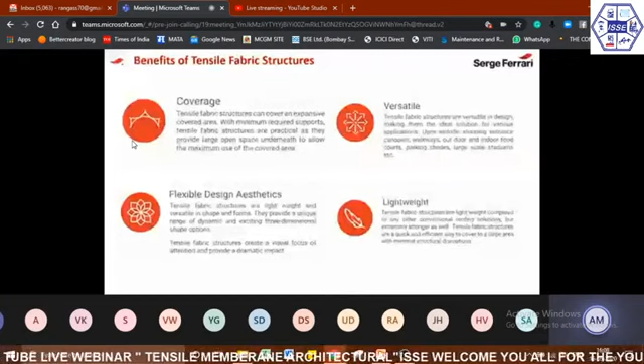Versatile in design. You can put your own signature on the building. It can be used for multi-purpose applications like entrance canopies, walkways, indoor and outdoor courts, parking sheds, large-scale stadiums, amphitheaters, etc. Because it is a flexible material, it can cover flexible designs, different design aesthetics. It's lightweight. Because of its light weight, it can cover wide structures.

We have an extensive color range, even though white is used most commonly. Weatherproof. We have 100% waterproof material. We also have mesh fabric for the application. Another advantage is in a couple of slides.

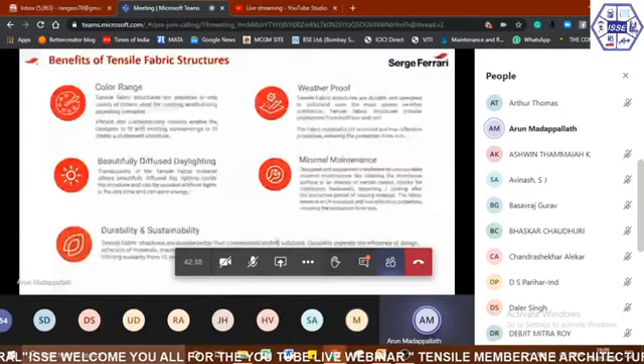Durability, it's a very durable material. Natural light is another benefit of tensile architecture. As you know, the sun gives us good natural light, thus saving on the electricity of the building. You can have good transmission of light, and at the same time, solar energy comfort as well.

We have different types of fabric which can be applied for these kinds of applications. Because of the consistency in manufacturing, the light will be consistent throughout.

All fabrics are flame retardant as well, depending on the type. In flame retardancy, we have PVDF coated fabric, which is self-extinguishing with limited degradation. When fire happens, the fabric catches fire but extinguishes itself, making a hole through which the fire escapes. That is the advantage of PVC/PVDF fire properties. We also have PTFE fabric with high fire classification because the base material is glass.

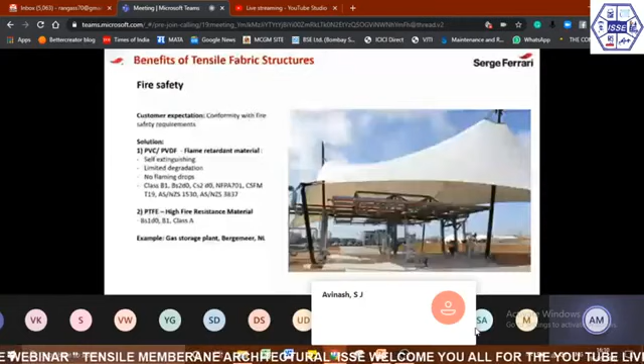Printing is also possible on our fabric. If there is a particular project, we can provide special printing so that you will have high durability of printing as well.

Regarding the lightweight advantage: the average weight of the membrane structure is 1 kg per square meter, and it can take a load of 20 per linear meter of fabric, which is really very high. Because of the flexible material, fabrication and transportation are very easy, and compared to conventional materials, it's much easier to manage fabrication and installation.

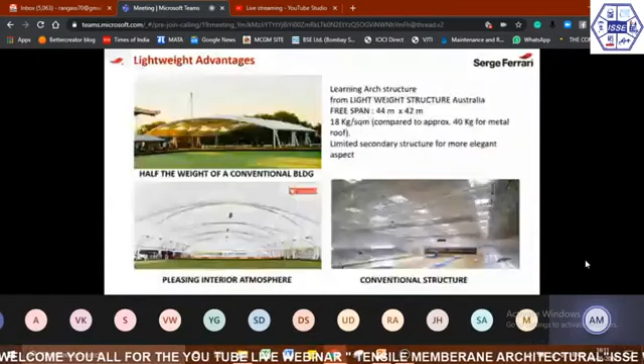It works in tension, and these possibilities exist for free span structures or secondary structures. The weight of the structure is less than half the weight of a conventional building, and there is a pleasing atmosphere because of the translucency of the membrane compared to conventional structures. This is a good advantage of using lightweight membrane structures.

Many applications are possible: stadiums, metros, airports, amphitheaters, indoor stadiums, walkway structures. A wide range of applications can be done using membrane structures, including enclosed buildings and big structures like amphitheaters.

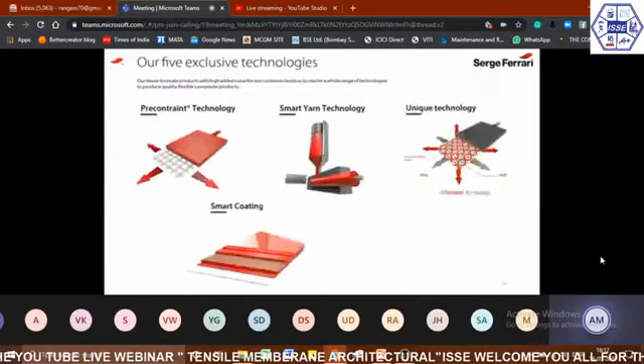Serge Ferrari has a different technology. The important one I would like to explain is the Précontraint technology, developed by Serge Ferrari. It's a French word, and basically it means pre-stress.

It's made of high density polyester, and during the coating process, the yarns are stretched in warp and weft direction with constant tension. The advantage is that the dimensional stability of the fabric is almost the same in both directions. Compared to other fabrics in the market, we have less than 1% elongation in both directions.

This is important because of climatic conditions and load. The fabric behavior is such that it elongates under different climatic conditions, but with Serge Ferrari, it returns back to its original position.

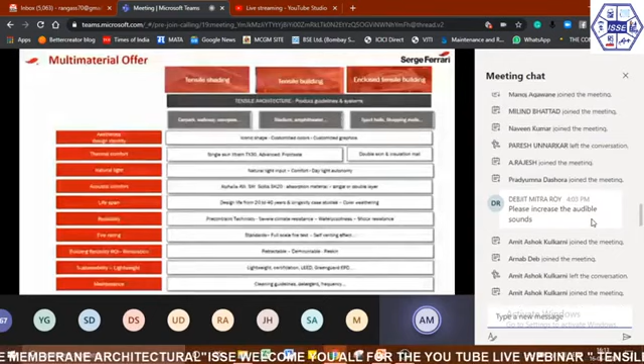In terms of material offer, we have fabric for different shading applications, building applications, and enclosed building applications. The advantage is that we can create a design identity and thermal comfort. If you have a building where you need good performance, we can give you solutions: single membrane, double membrane, or with insulation, while still allowing natural light inside.

We also have fabric for acoustic performance as a second membrane, which can be used for indoor and exterior applications. Lifespan design starts from 20 and goes to more than 40 years. Material longevity is there, and the new range of fabric, PTFE, has a design life of 50 years plus. Because of the Précontraint technology, the reliability of the membrane is good and the lifespan is better.

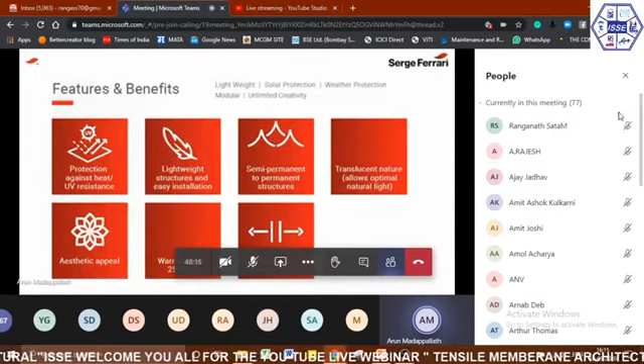All the fabrics are fire rated according to different standards. We also have LEED certification and lightweight options according to requirements, and maintenance is very easy in membrane structures. There is protection against UV, lightweight design, and it can be used for semi-permanent or permanent structures, with accuracy of light, good aesthetics, and warranty up to 25 years depending on the fabric type. Span structures of various kinds can be done using membrane.

This is the range from Ferrari. The premium range in Serge Ferrari is Xtreme TX. All the fabrics are manufactured with high density polyester coated with PVC, but we do a special coating on top of the PVC and on the backside of the PVC.

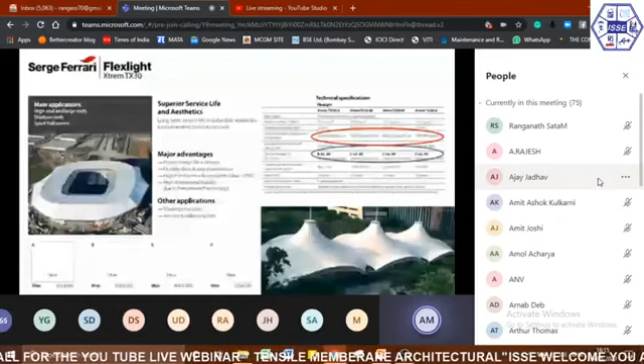Different types of coatings are available, and in Ferrari Xtrem TX30 this coating is special, a cross-link PVDF coating. The molecules of the PVDF are linked together to give a design life of more than 30 years, which is why it's called TX30. It gives TX30 better longevity, which can be used for big span structures.

Because of Precontraint technology and high concentration PVDF, a special machine is required to weld the fabric. This machine is called an abrasion machine. Companies like Western Outdoor have this type of machine to do the abrasion for welding.

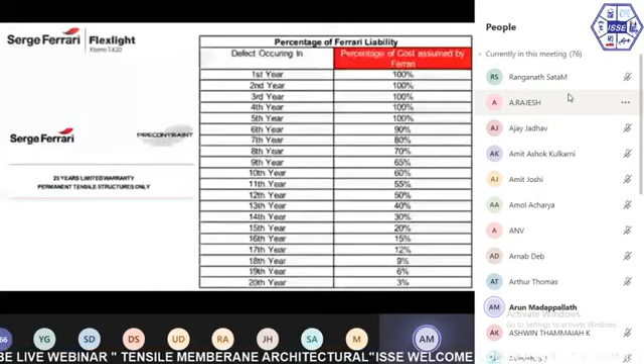With high concentration PVDF, Ferrari is the only company that provides a better PVDF coating, so abrasion is required before welding. We give a warranty of up to 20 years and up to 25 years depending on the structure, and it's a diminishing warranty. The first 5 years we give 100%, and the warranty diminishes after the 6th year.

We have an advanced range of fabric. This is the second range of fabric from Serge Ferrari after TX30, and it's the one commonly used for many projects in India. Again we have fabric types 1, 2, 3, 4, and 5, depending on the structure you can select the fabric. We also have a high translucent fabric in this range, with the same 15 years warranty.

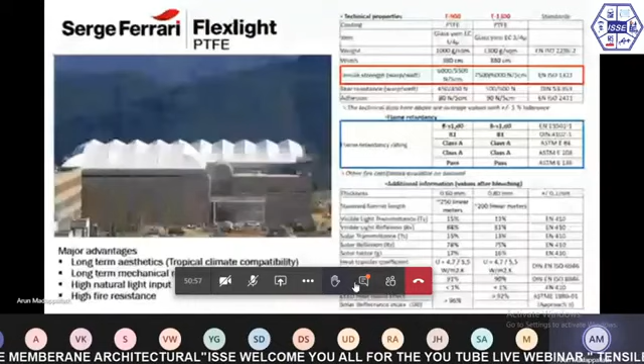The new development from Serge Ferrari is Flexlight PTFE. We have 2 types of fabric, 3 micron and 6 micron. Again, type 2 and type 3 in 3 microns, and type 2 to type 4, type 5 in 6 microns. PTFE is a special material which has better fire retardancy properties than PVC coated membranes. The warranty is 15 years for this type of membrane.

We also submit test reports for all our products, including fire classification reports and other reports, as required for the project.

Here are some case studies. This is a 20 year exposure membrane - we replaced this membrane with new fabric. The membrane structure was originally done using Ferrari fabric and it stood for 20 years. After 20 years we made a longevity study and re-skinned it with this material.

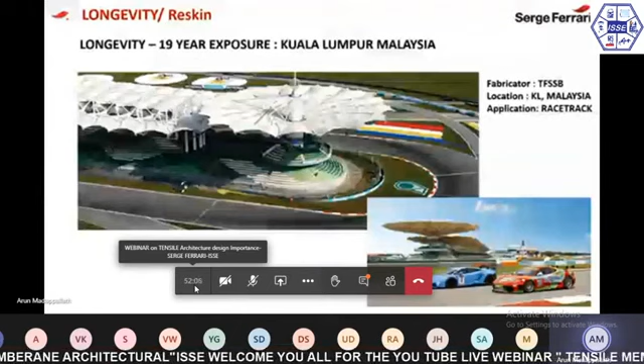Again the same for the KL project - we replaced the racetrack with our new fabric, which is TX30, after 19 years of exposure in Kuala Lumpur. 15 years of exposure in Shanghai Messe, with 160,000 square meters of fabric used for this project, still intact.

So normally it's very good performance compared to the weather conditions of different regions. We have a wide range of tests done for different projects all over the world, and we can provide certification for that.

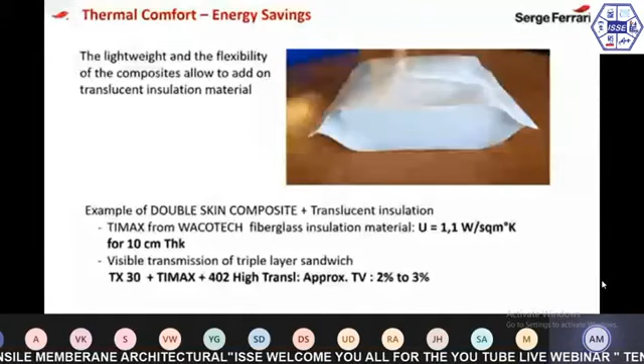Energy performance is an important criteria - there are possibilities of saving using membrane. Here the example given is a double membrane structure with insulation material from Timax. You can reach up to 1.1 watts per square meter degree Kelvin for the U value, and at the same time get 2 to 3% light transmission using membrane.

This is without insulation - we can use double membrane or single membrane. The U value for facade and roof is 5.9 and 6.4 respectively. If you put a double membrane, you can get the U value down to 2.9 and 3.1 respectively for facade and roof applications with our membrane.

We can also use our micro-perforated membrane for better acoustic performance. This is one case study for a double membrane structure - the top layer is TX30, and we used 402 as a secondary membrane per the project requirement to meet the solar factor and U value.

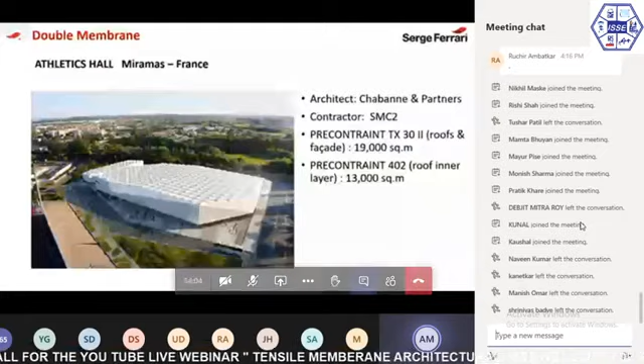For acoustic performance, this is a new range from Ferrari which can be used as a secondary membrane indoor or outdoor, which has an NRC value of 65% with a 100mm air gap. We can go through more details.

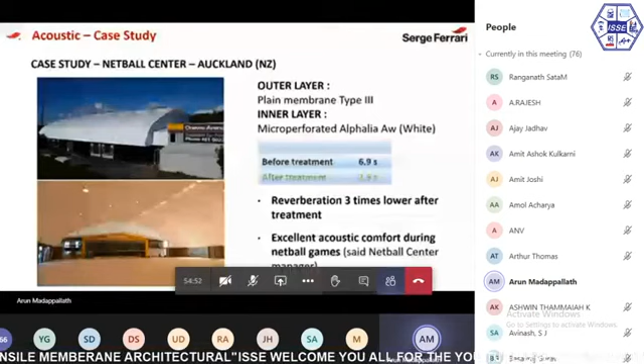This is Alphalia AW, used for internal acoustic performance. In this case study, before the fabric treatment, the reverberation time of the sound was 6.9 seconds, and after treatment it reduced to 2.5 seconds. So with Alphalia AW as an inner membrane, reverberation time is 3 times lower after treatment. This is for comfort of the sports happening in the building, and the reverberation of sound has come down drastically, giving a comfortable solution.

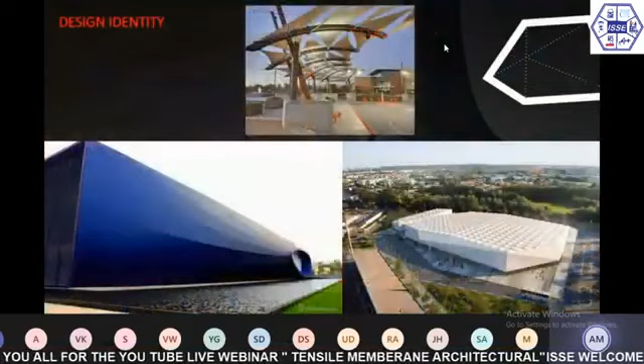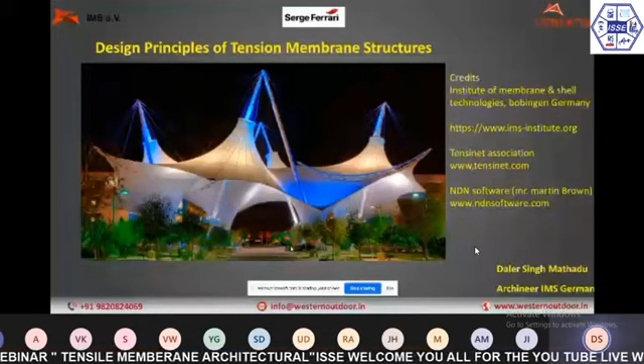And as the skills of mankind advanced with time and experience, they started constructing with other elements like stone, then wood. Throughout the evolution of history, we can see that once we had made something, we always yearned for more. And more meant wider spans, bigger spaces, volumes. That's where the membrane structure industry of present day has arrived.

Normally, I have a topic for architectural students, but here today I am with my friends, structural engineers. So just some notes: tension membrane structures, as you can see, compared to normal structures—classical membrane structures have more tension-only elements and very few compression elements in the entire system. Elimination of bending and other forces like torque and whatnot makes this very efficient. That's how the term lightweight structures has come about.

The most important part of understanding the system is that the roofing membrane is not just cladding, it is the structure. This is where the deviation is from normal everyday structures, where we have a primary structure and a secondary structure. The secondary structure does not necessarily participate in the stability of the whole system. Whereas in the field of membrane architecture, the roof is the structure, so it can be called the primary structure.

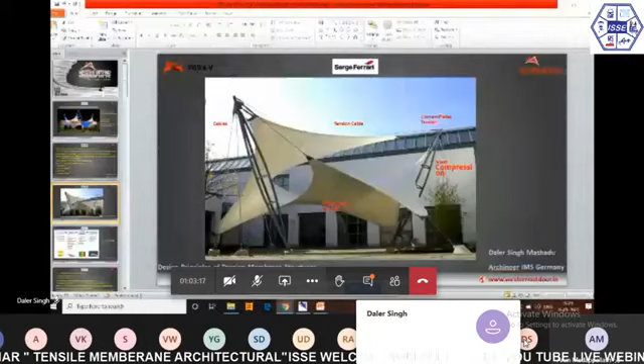Now it's on. Yeah. Am I audible now? Yes. Okay, thank you. I think somehow the mic got muted. So where was I? I was with the start? In this slide only. Okay, in the slide. Thank you. Because normally we are not so used to speaking to the computer without seeing people and their eyes. It becomes difficult. You don't know when you are off and you go on blabbering. Thank you for bearing with me this lacuna, and I request Arun to please bring me back.

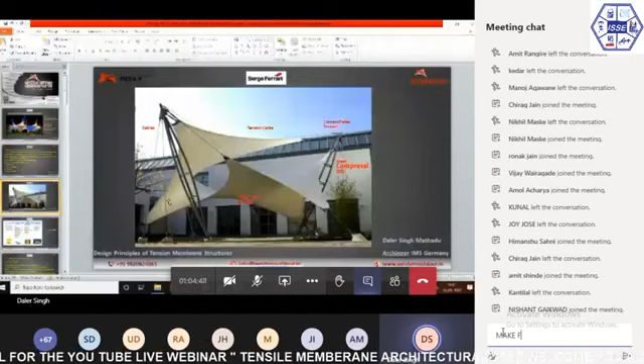Coming back to the tensile structures, you can see over here, the membrane is in tension, the cables are in tension, so are the corners and hardware. And even most of the foundations are in tension. Only 4 foundations where the mast is connected are in compression. This also means that tensile structures may seem light in air, but they are heavy in ground. Because to maintain equilibrium and stability, the ground anchors which take the tension of cables become quite heavy in relation to the compressive foundations of the mast.

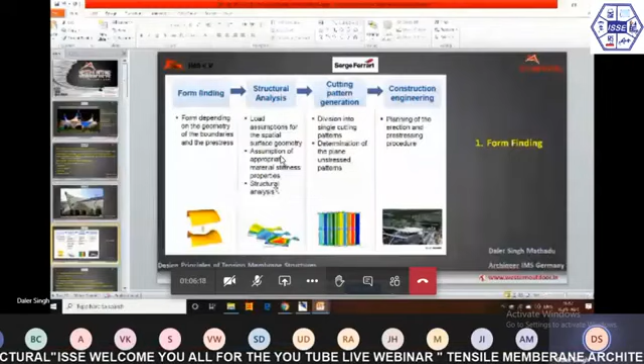So in short, this is how the system looks like. Free flow of this process: the form finding, the structural analysis. Now here when I say structural analysis, today with this time constraint I will restrict myself to the analysis of the geometry, the fabric and the cable part.

And then there is one very important aspect of, hello? Yes, continue. Okay, thank you.

Cutting pattern generation and then construction engineering. Moving forward, the 2 most important parts.

Can you make your screen big, the presentation mode? Okay, one moment now. Is it okay now? Yes, yes. Okay, thank you. Sure.

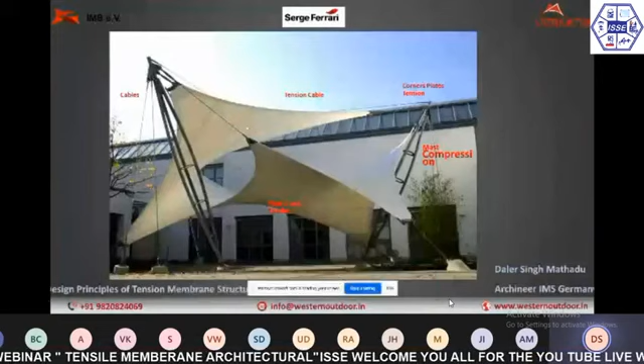So if we see this membrane construction, there are 2 inherent forces, 2 important criteria. One is the geometry and the other is the pre-stress. The combination of geometry and pre-stress is what we call the form. So in the relationship between form and force, we can call pre-stress a force. The interdependence is that form follows force and force follows form. Now, this is a very unique deviation from the normal statically calculated structures.

What does this mean? This means that if I have a weaker form, for example the curvature, you can see in this small 2D representation of the forces acting on a tension cable, that with the curvature being less over here in this part, we have more forces for the same applied force. So geometry acts as a component of stability rather than just a shape. That is why the term form finding.

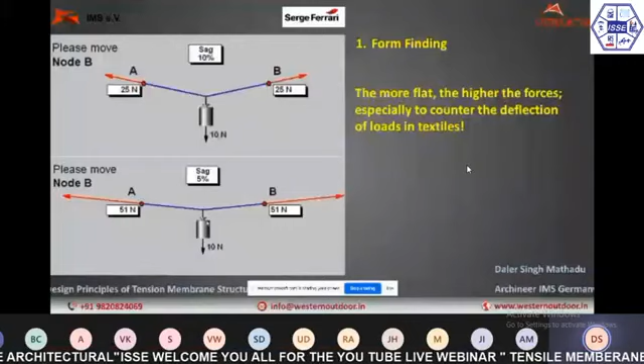Because an engineer who is supposed to develop a structural system and has been given some inputs would like to make a reasonably efficient, highly curved surface fitting with the parameters of the architect or the client. So here this process itself becomes an iterative process. Unlike the normal structural process where we have the main structure and then there is a choice of cladding, whether it may be metal decks or plastic sheeting or something else. That becomes secondary.

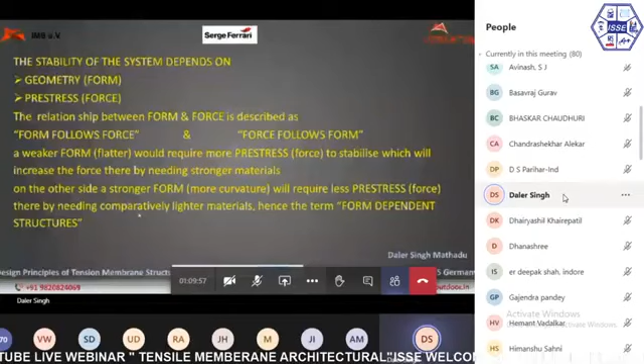In fact, in membrane structure, we have a top-down approach to design itself. And the top-down approach means find the form and the pre-stress needed to stabilize it, and then eventually once we load, we come down to the main substructure or the supporting structure. So the interdependency is the fundamental part of tensile structure design: geometry and pre-stress, form and force. Force follows form and form follows force. It's a deviation, but it's very exciting, friends. Once we get a little bit of hang, the brilliant minds in this seminar can easily take it up.

Now from 2D, if we go 3D, on the left hand side, if we see the first picture, I hope the picture is here. Yes. There are two cables. Thank you. There are two cables stabilizing the point M in 3D space. Now, as I can demonstrate, if cable AB is more tensioned than the cable DC, the point M will move upwards. Means the geometry changes. Similarly, if the opposite side cables are in more tension, then the point moves down.

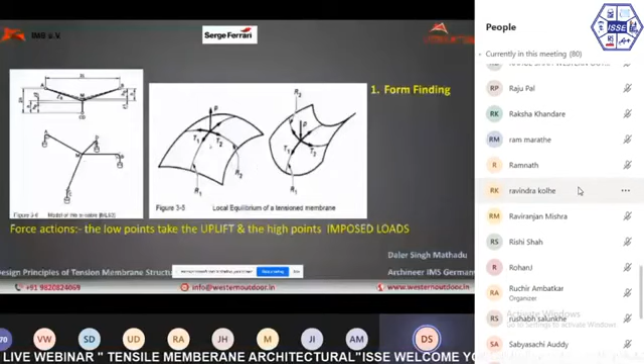So the force and geometry relationship can be seen by a simple model. On the right hand side, we have now converted this into a surface. So what we can see over here is surfaces. The surface which is inflated is a synclastic surface, and the surface which is inverted is an anticlastic surface. Two most important

geometries for membrane structures. We all know the flatter structures won't work with membrane structures because less geometry means too much pre-stress to stabilize it. And as we start increasing the pre-stress, the forces go on increasing, and so the structure becomes heavier and heavier and heavier.

Yes, if we stick to the geometries of synclastic or anticlastic shapes, we can bring in the component of geometry and play around with pre-stress so that we have a stable structure and the supporting components are also reasonable and easy to the eye.

Here we can see once more how this anticlastic surface works. If you see the cable R2 and R1, for example, the structure is loaded with imposed loads, like wind load, snow, or any other imposed load. The cable R2 will be under tension and the cable R1 may relax.

Here I have in front of you what we call a boiler formula, or the component pressure in a cylinder. This brings me to a simple solution. In a curved arch, tension is equal to pressure into radius. So as the radius becomes shallower, the tension will increase if the pressure is constant. And similarly, when I go on increasing the curvature with the same kind of pressure, I'll get lesser tensions. And this is how we actually hand calculate.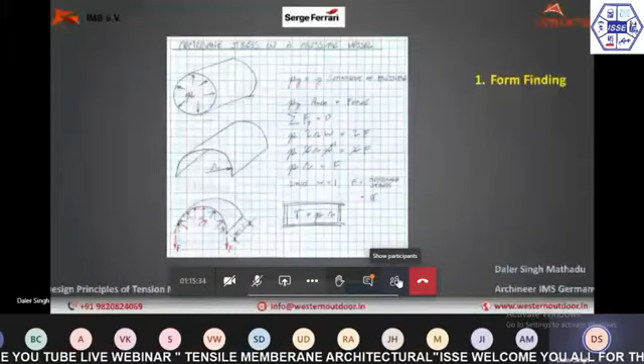Because as we all know, today's world is full of softwares. There can be elements of garbage in, garbage out. There can be elements of missing something because these are complex geometries, non-linear stuff, different E-moduli, different algorithms used. And once we come out with a solution, it has to be hand checked: am I near or am I way off? So these are the two formulas. One is which I am sharing with you, and the other is the force density formula.

Now coming back to the actual shapes and the variations of shapes possible, the geometry possible, because we see various different geometries all over. The first one is anticlastic shape, or what we call a hyperbolic paraboloid. Architects love to call it a hyperbolic paraboloid. And on the right hand side is a synclastic structure. It's a component of pneumatics.

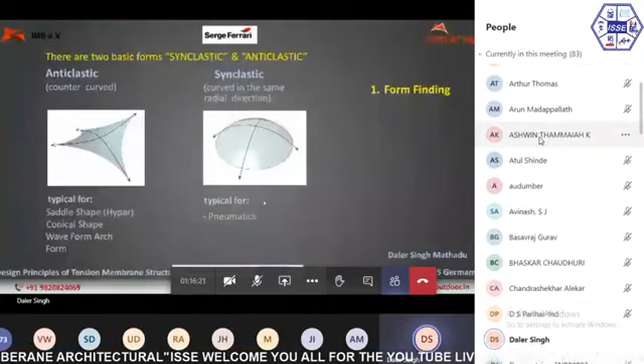In the pneumatic structures, there is an additional component which is the pressure. It can be a double skin structure or single skin structure, as you can see in air inflated structures, where the stability comes by pumping pressurized air inside the membrane. And depending on the atmospheric pressure or wind conditions, this pressure is modulated.

And this has helped us in making huge structures which can be deployed in hours rather than months, and which can withstand a lot of forces in snow. In Europe, where there is 6 or 8 months of snow, for outdoor sports like skating and volleyball, tennis, football, you can see large air domes where the inside temperature is maintained inside the envelope, maintaining the temperature as well as maintaining the stability of the structure.

However, today's topic is the anticlastic structure, the classical membrane form. Talking about variations, you can see how the basic forms evolve. The conical structure, which we regularly see all over, it may be like this or inverted, a funnel shape, which I think everyone getting out of the Mumbai international and domestic airport would see at first sight. Let me tell you, friends, these structures are now almost 14 years old. They are still stable and they look absolutely fantastic.

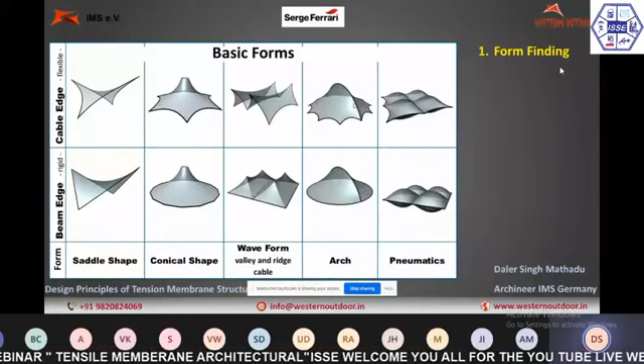Just a reference to Ferrari fabrics with excellent creep resistance properties, technology, and coatings. We can surely make our so-called umbrellas last for as long as we want. So the conical structures are again anticlastic structures. On every given point of the surface, most probably we will find two curvatures going in opposite directions. And so is this wave form and this arch and again small arches. The upper line is with cable edges and the bottom line is with beam edges.

So a cable geometry leaves wide areas open. In cities, we are restricted for space. We want to have a structure, but not give much of space. So we can use rigid edges, called a beam edge.

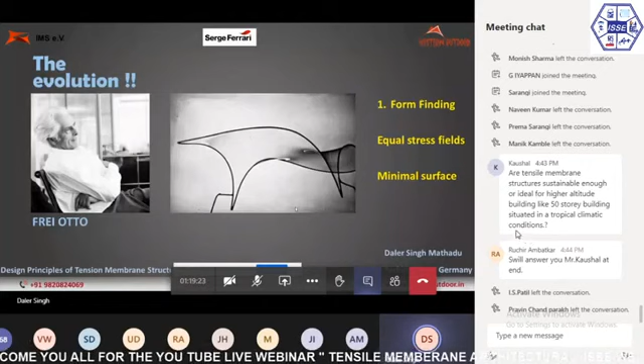He had an idea that if you take a boundary and dip it in a soap bubble liquid and it comes out, it will be a minimal surface. The reason being, the soap bubble film is so vulnerable and so thin, it cannot bear uneven stresses. The minimal surface was so that we can save on materials, find a minimal surface between given geometry. Till that time, the algorithms and the equations were not there. I think this is around the 1960s. So even computers would be the size of buses, maybe BEST double-decker buses, God knows what. So it was left to imagination.

And then there was another contrasting thought of creating an equal stress field. Because as we all know, these structures, although they can be reinforced, are not like normal structures where we can use a heavier element at the corners and at mid-span go on being lighter and lighter. That is not possible with membrane structures because they are also skylights. They allow light inside.

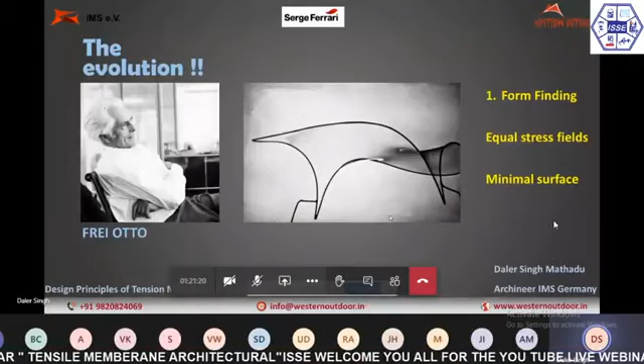So he was experimenting with his soap bubble films and he did a lot of research on various shapes. The photographs are all from the life and history of Frei Otto, his works, and we can see the intensity and passion of trying to find a form. And he believed that if a form is a minimal surface, it has to be an equal stress field. With an equal stress field, we can use very light, flexible materials. We do not need something which is very strong and which takes a lot of loads.

He did a lot of experimentation and eventually he arrived at this. And we all know this was one of the wide span structures of its time, the path-breaking cable net structure of the Munich Olympic Stadium. Till such time, engineers were working around, trying to work out various numerical theories, models, equations of the second and third order, trying a combination of materials and trying to work out interdependence.

As you can see, with membrane structures, when we start analyzing them, being very flexible, the first iteration of load deforms the geometry. And suddenly, there is a new geometry. And this new geometry will work towards its stability now. So it is not a static load which we put once and then come out with the results and stresses. Here, with every iteration, the geometry also changes, and so does the force. So all the time I have to remember that form follows force and force follows form.

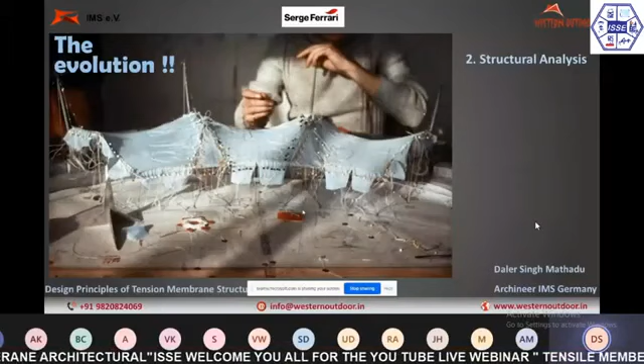And you can see over here the evolution. The small pieces of similar weight and trying to work out cable fields, although this was a cable net structure covered by plexiglass, because at that time our forefathers were not so confident about membrane structures. So they put plexiglass on this cable net structure. You see here, this covering is all plexiglass.

However, while working on this, the engineers, and that is where the force density method of analysis happened to be. And since then, you can see how daring mankind has been, how the earlier works have given the courage and experience and the tools to various people. So this is Denver Airport, landmark structures throughout the world.

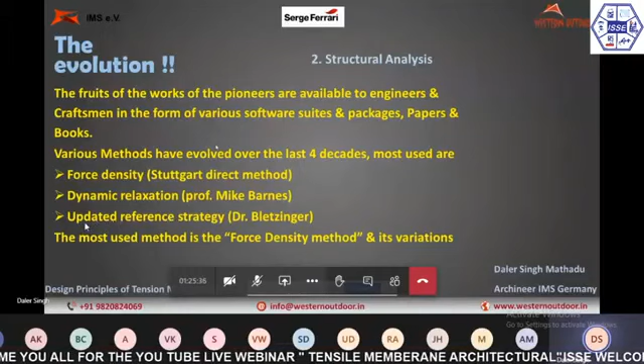So here are the available tools which evolved from there, the force density method. It was also called the Stuttgart direct method, the dynamic relaxation by Professor Mike Barnes, Bath University. And then there was the updated reference strategy method by Dr. Bletzinger. He comes from the Munich Institute, and he is associated with the Institute for Membrane and Shell Technologies.

I have taken a small model and just wish to take you through the process of what I have earlier described. There is definitely a geometry import into the structural system where we define the boundaries and the heights, etc. There is a generation. This is the nonlinear 3D phase. Once we do that, we do a process of form finding. This form finding is algorithmic and numerical.

And then we play around with these stresses. For example, if I have curvature in these cables, I know I will need slender cables. But at the same time, my covered area would reduce and the architects would throw away my structure and say, Daler Singh, I want to cover the whole area, not 50% of it. So again, I'll have to increase the pre-stress in the cables, which would mean more force into the system.

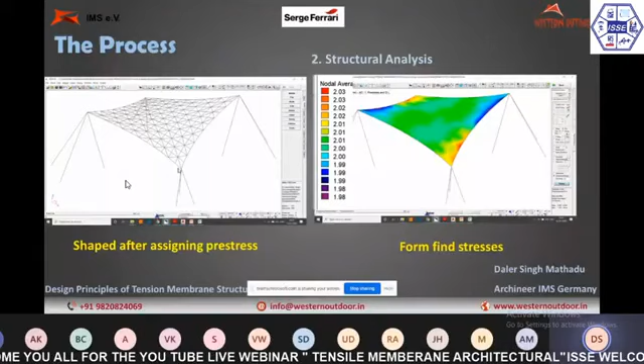And once the engineer works out an equilibrated shape which satisfies the conditions and is almost there, we run through a small structural analysis of just the pre-stress. And you can see on the right hand side, this is the analysis of the pre-stress. The pre-stress was envisaged as around 2 kilonewton, and we can see over here through all these numbers that we have a very uniform pre-stress.

And then comes the loading part. The loading part again is a challenge. The normal forms which are described in codes, the wall shape, pitch roof, the freestanding, the Northlight ones, and membrane structures with their unique shapes, combinations of shapes which are conical with a hyperbolic end and whatnot. So it becomes very difficult to estimate what the wind loads will be.

Again, thanks to the various computational fluid dynamics programs around the world, we can do it at a much faster pace and much lower cost. The earlier membrane structures were all subject to wind load analysis, wind tunnel testing, and it was very time consuming, and it took a lot of time and a lot of effort, which included a lot of money. But frankly speaking, there was no alternative to membrane structures.

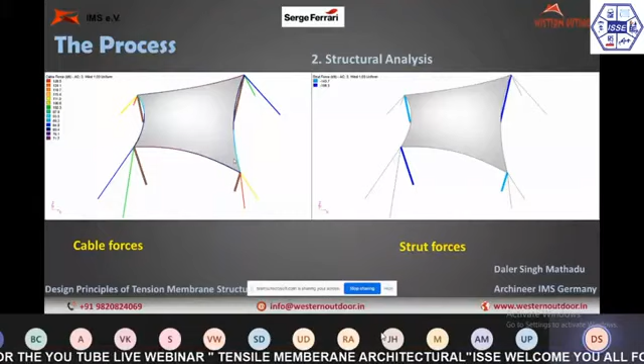You can see over here the forces, some forces in the struts, forces in the cable, and then the cutting pattern generation. Once having made a 3D surface, Ferrari supplies us with rolls of fabric.

So there is one part, it is the unfolding of surface. People tried various ways like making small 3D models, pasting of paper on it, cutting it to a shape, and then unfolding it and enlarging it. But with the present day computers, it's become much easier now.

The seam line drawn over here can be geodesic or can be section cuts. The difference between geodesic and section cut is that geodesic, as we all know, would be the shortest distance between points on a curved surface, whereas the section cut would cut it simply through. So geodesic cuts make the edges straight, which means we will have little loss of fabric and we'll be able to utilize the entire roll of fabric.

Now this patterning is also an architectural part of the structural system, where we can line the seams in such a way, whether it may be diagonal, perpendicular, or any other shape, or maybe in 4 sides. However, the most important part is to understand the warp and the weft of the primary material, which is the fabric.

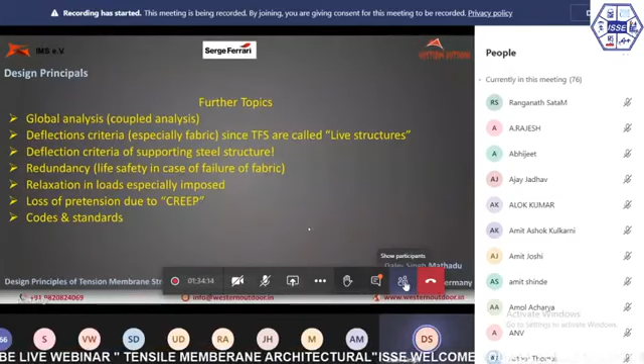Maybe further topics. As we talk about global analysis, the coupled analysis, which needs special packages, we talk about deflection criteria, especially of the fabric and the entire systems, as these systems are supposed to move. They are live structures. That's why they are not used for housing complexes or abodes, but for temporary camps, tents, stadiums, malls. But this criteria is different from the normal criteria. We have these thumb rules, the deflection criteria developed by the TensiNet Association.

This is due to the uniform lack of codes and standards, where we have Japan developing its own codes and standards, so was US, so was France, and to a certain extent UK and Australia. Coming back to India, if I have to satisfy the Indian codes deflection criteria, I don't think I would ever be able to make a tensile structure because it's a large deflection structure.

So the normal criteria that we follow is that under normal wind loads or even full wind loads, it should not be so much as to make it obvious, and then the users start panicking below it that it might come down. So user comfort is again a criteria for deflections, and again it is left to the engineers. However, we can introduce a lot of cable elements inside the membrane, thereby cutting the deflections and bringing it to a reasonable level of about L by 50 or around 30. Internationally, these are considered good.

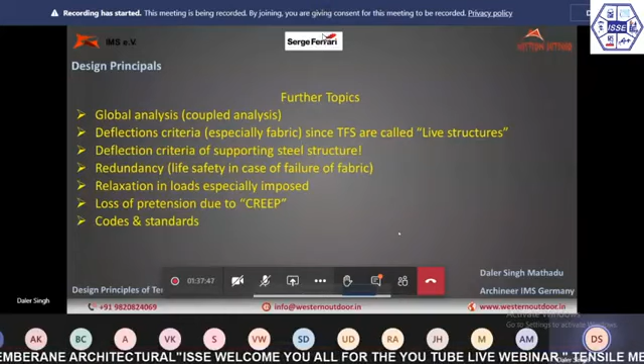Universally, 0.4 or 0.5 kilonewton is the expected criteria. And even today's engineers in India are open to out-of-box thinking, not sticking strictly to the code, but using their own imagination, intuition, and experience. They can envisage that such a highly curved surface cannot hold a person every square meter. That's not possible, so why put it?

The last criteria I'd like to touch on is loss of pretension due to creep. Elastic elements under constant loads will tend to creep, and our structures depend on pre-stress for stability. Creep would mean loss of pre-stress.

In such cases, better quality materials, such as those produced by Ferrari with their Précontraint technology, stretch the fabric while it is being coated, and the stretch is in equilibrium. It is similar in both directions, the warp and the weft, and on the length side both, which shows that the creep, if ever it occurs, is uniform.

Taking the element of creep into account, membranes normally have a retensioning system built in. The engineer, taking a top-down approach, takes care of the creep, the forces, and the biaxial behavior of the fabric.

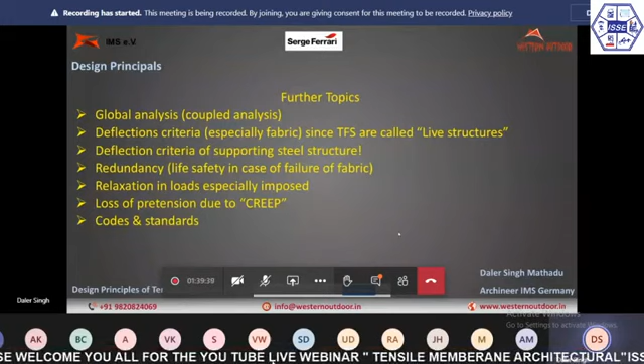Biaxial behavior is very important for fabric structures because there are manufacturing companies whose fabric does not have similar behavior on both sides. For introduction of pre-stress, compensation, or cutting the fabric short, is an important criteria.

If you see these flat panels, they would be compensated to the exact percentage required to put in the pre-stress. Once stretched to the system point, theoretically we can say, yes, we have put in 2 kilonewton pre-stress. So that is another element the engineer has to think about.

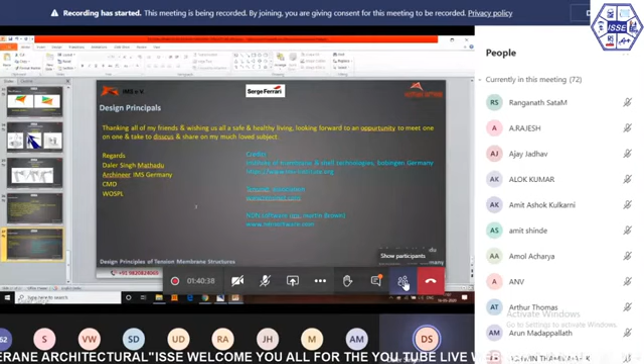Eventually, last is about code and standard. I think I've taken five minutes more of my time, while thanking the Institute, Ferrari, and all of my friends gathered here today on this Saturday afternoon in the Corona lockdown, listening patiently. I would thank you from the bottom of my heart because I represent not only my industry, but the membrane industry as a whole.

Being passionate about it, I would want more and more architects to use this lightweight, eco-friendly, preserving material system wherever it is appropriate. Appropriation means wide spans, smaller structures, and in fact, if you see COVID hospitals, most of them are covered with fabric, whether inflatable or clear span.

If all the advantages are appropriate for the usage, then I can assure you that with today's availability of materials, experience, and computational tools, complementing machineries like cutting plotters which can cut fabric to an accuracy of 0.2 millimeter, high frequency welding machines, and testing facilities, all put together satisfy your requirement for an aesthetically pleasing and stable structure.

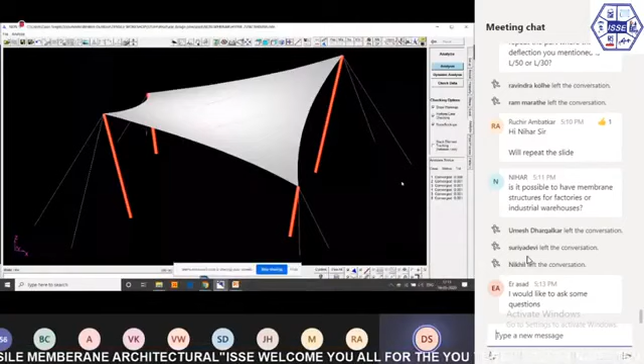Let me be very clear - I'm a student of the field, and I would not want to use such a beautiful material where it can be replaced by something cheaper, where it is not appropriate. For example, industrial buildings: membrane is very lightweight, so thermal comfort is restricted. It bounces UV light, but being a very thin film with low mass makes it vulnerable and uncomfortable in enclosed surfaces.

It means you'll need to make it comfortable by either insulating it or putting in a lot of cold air, or in case of Europe and other countries, you need to purge hot air. Then you come out with condensation issues.

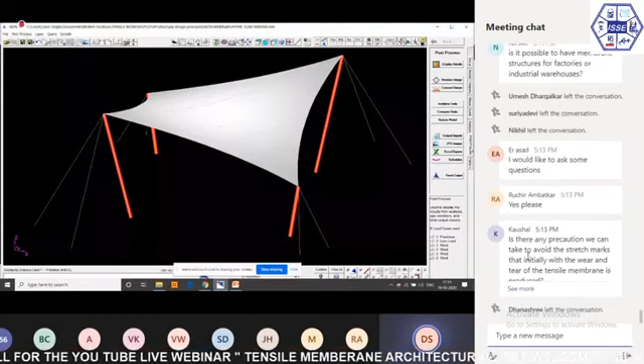Talking about warehouses, yes - deployable warehouses where the fabric can be removed and reused multiple times. We can all see exhibition structures, present-day wide-span exhibition structures. They are quite stable if they are well designed with the code and standards by an experienced person.

The present industry is also asking for a lot of warehouses. Recently, we built one for Lupin. Now I am in the process of developing fast deployable COVID hospitals for my municipality, the Thane municipality, and very soon, within a day or two, I will freeze the concept.

I had proposed pneumatic structures, but the corresponding engineers are still not so comfortable with this - they call it a vague idea. So they asked me to put in some steel and fabric and forget about the rest. That's how it is, but yes, we can do it.

Thank you very much. Another question: can these structures be designed in STAAD Pro for steel members? Yeah, why not - there are possibilities.

Ruchir, is my screen visible? Yes, fine. For example, this is a classical structure, and the strut elements here, the red color elements, are struts. It is just a compression-tension member - it cannot take bending, it cannot take torsion, it's free.

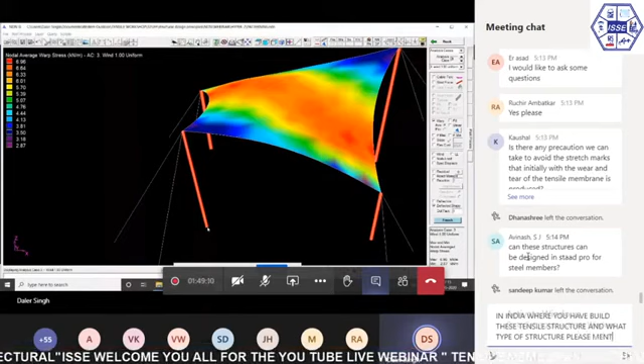Just for this single member design, how will you model it in STAAD instead? This will not be possible because these are two cables, and there is a corresponding cable over here stabilizing the system. Such structures are not possible in STAAD - it is better to hand calculate the steel because it's much easier now.

What we come up with - let me show you the forces over here. Let me see the reaction, and we simply find out that this strut member is undergoing 182 kilonewtons of compression. Given the length, I can easily work out the type of section needed and the thickness.

For complex structures - rigid frames like the Kanha Ashram structure shown to you by Arun, which covered more than 4 acres - we can do an uncoupled analysis where we create a set of nodes which are assumed fixed, representing the connections between steel and membrane. We analyze the membrane separately and transfer the forces onto STAAD or SAP or any other software. So it can be done.

Many times, corresponding engineers or vetting engineers, when we go to IITs or engineering colleges, we often need to either hand calculate or provide them STAAD files which can be checked. Yes, it is possible, and we can do it for most of the cases.

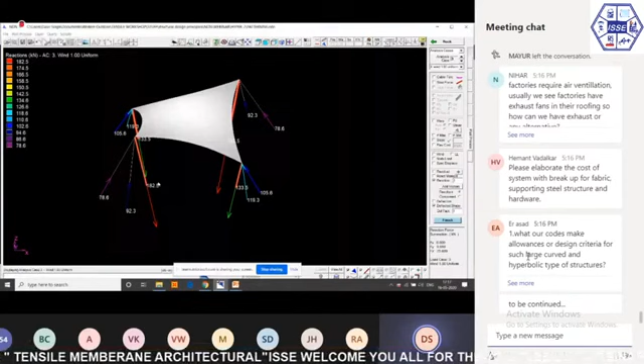One more question is that factories require air ventilation. Usually we see factories have exhaust fans in their roofing. So how can we have exhaust or any alternative?

Well, we can put on turbo fans over a structure. We can create vents, we can stagger them, make them north light. Yes, it can be done. Now if you want other ventilation, preferably from the sides for air ventilation, there are strong meshes which can be used that allow a certain percentage of air to come inside. So rather than have louvers, we can use mesh fabrics, and these are regularly used in various stadiums. So it can be used.

Okay, sir, another question. You wanted to see some Indian reference, project reference. Could you please show? I'll try to pull out one of the structures. Meanwhile, I would...

Well, we can go on to the next question please. Okay, one sec sir. Okay, please elaborate the cost of system with breakup of fabric, supporting steel structure, and hardware.

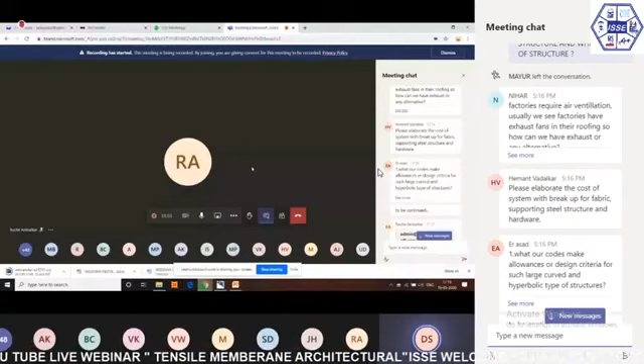And this is how the spread is. Overall material cost and the cost of production would be around 60% of the total cost given to you. So 40% roughly would be gross margins for the design build company, whosoever makes it.

Now talking of the price range, a simple structure can start from 300 rupees, and then a very complex shape, complex geometry using cables, using fabric, using glass, can end up to 1500 or 2000 rupees a square feet. But the normal range for cladded structures used throughout India with good quality Ferrari 25-year fabric can be had around 600 to 800 rupees a square feet range, where the steel consumption comes around 3 kgs a square feet or so, just giving you a thumb rule.

Okay, now again this question has part two. Yes, strength and serviceability criteria limitations. Right, now we use the same criteria as used for any other structure.

Now the limitations, if we compare it to steel, as I mentioned earlier, the material cannot be compared point to point, maybe glass, concrete slab, or a steel deck. Every material has its own inherent advantages, and if you compare it with some benchmark, then it can become disadvantages. Like I spoke about creep. Creep is one element where there will be loss of pre-stress over the longer serviceability state, talking about 20 years, 30 years. So adjustments have to be made for that.

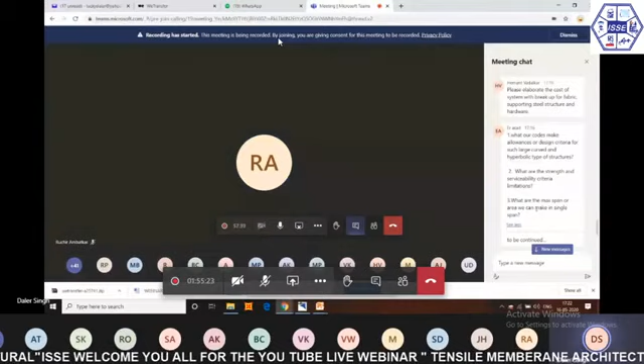Large spans are possible. Now talking about a max span, let me take you back to the time when Frei Otto was thinking, and he wanted to cover huge spaces. He had the idea of covering huge cities. In fact, the dome created by Nicholas Grimshaw, what we call the Eden Project, it's a diagrid structure, a space-frame structure with pneumatic structures on top, and then eventually he has an entire tropical island.

So the span, if we speak in general, if you're talking about 100 meters, it's okay. It's okay with a truss cladded structure. It is normal these days to think of such meters. But if it goes beyond, then there has to be a lot of input, a lot of out-of-the-box thinking, a lot of different material possibilities.

But I do believe that the bounds of the human mind are limited to imagination themselves. Because if materials are not there, they can be created. If numerical theory is not there, we can see Frei Otto create it. So I think it is, Asad ji, I would say yes, if you can dream it, let's do it. Let's try it. Okay, why not?

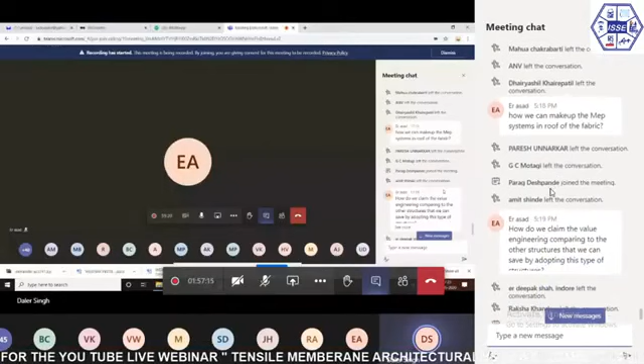Now again, how can we make up the MEP systems of the roof fabric? Now, as I have mentioned, we can have a sub which would take care of all the lighting systems, all the ventilation, all the air conditioning requirements. Yes, that is normal. But most of the structures, if you see in malls, etc., we use them to have a roof which gives in a lot of skylight, so we can save on energy. But again, most of the malls are covered with fabric, and they all have their MEP systems; hanging from the roof, the architect may not like, so they come from the sides or the peripheries.

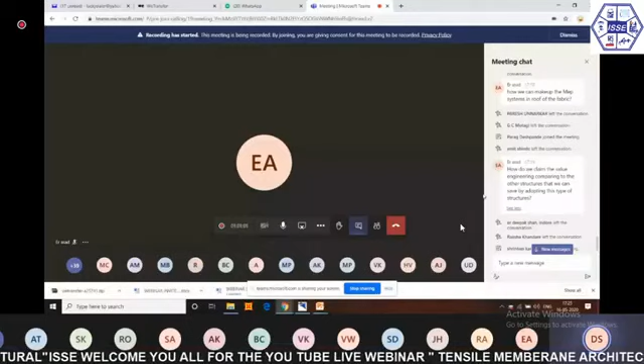As we all know, cable net structures, we have a tension ring inside, then we have a compression frame outside, and between the tension and compression frame, we have cables stabilizing both for the imposed loads and for the uplift. So value engineering can be done comparing the usage and the needs, not by comparing to other structures. This is what I believe is where the value engineering comes from. When I need to cover a certain space, yes, I can check systems, whether I can have a rigid cantilever going on, or whether I want a complete cable net structure.

So a beautiful example is the Jawaharlal Nehru Stadium. Again, it's got good cantilevers. Again, there is no structural element connecting between the tension ring and the compression ring. They are all cables and membrane. So yes, a lot of value engineering can be done because the possibilities are endless. As I was explaining earlier, form and pre-stress, usage of materials, addition of cables, you know, we can do a lot.

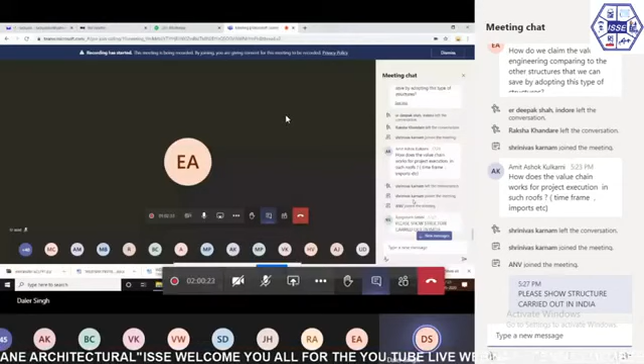How does the value chain work for project execution in such roofs, time, imports, etc.? Well, generally, if we compare it with PEB, the pre-engineered buildings, we can say we are very comparable with them. But when you talk about large spans and stadiums, then it's a different game altogether. Now, with respect to time frame, I would like to mention over here the development of the tensile structure industry in India has been very rapid. There are a lot of fabricators, good companies, good freelance engineers, and very good suppliers like Ferrari who have put a lot of effort into developing the Indian market. They have stocks, but still stocks can be made and brought in within a very short period of time.

For a project like a stadium, I can see a total working of, say, around 6 months for maybe 30-40,000 square meters. So again, the time frame would depend on the usage, the type, and the complexity of the shape.

So, Ruchir, would you show the structures carried out in India? Arun sir, he has a better picture. He'll try. Okay. Yes, I think I have it on the screen. Just go through it.

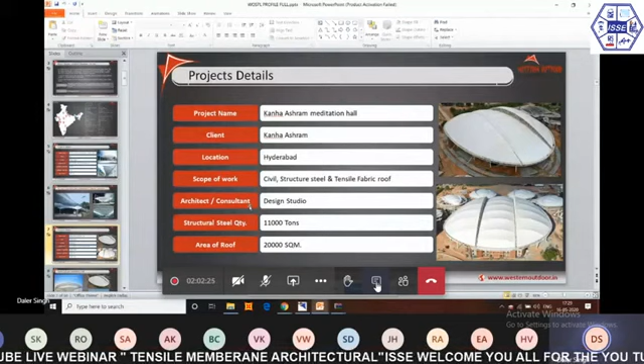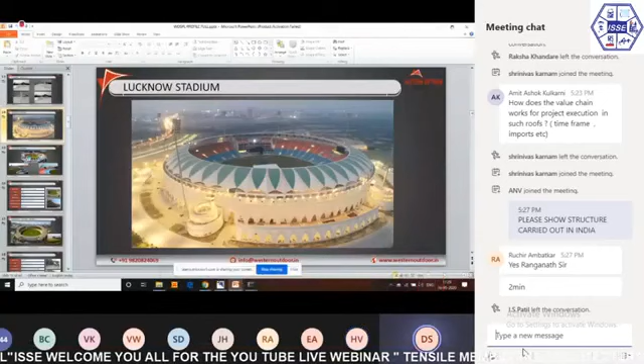This is the Lucknow Stadium, where we can play around with colors. Now, when the stadium was designed and constructed, at that time the green color represented the Samajwadi Party. Now, we cannot change it to red. This is how it is. This is how India works. And so this is where we have a tension ring, and then there is a compression ring outside, with arches spanning and the fabric stretching and valley cables stabilizing the fabric. Here are the cables.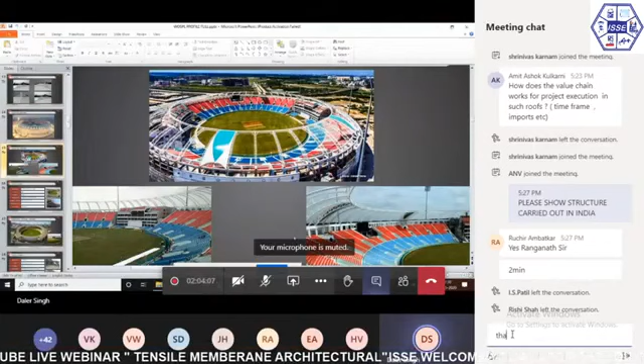Here are the valley cables, and again taking into the system. So this is how we can design a very simple one. This is under construction. The overall usage for this 30-meter cantilever was around 35 kgs per square meter, which is considered lightweight, very lightweight. But the geometry is fantastic.

You see, I have a complete ring inside, and it's a hub and spoke model, one of the most stable geometries which we can ever play with. And this is where the geometry plays a very important part in stability of the structure.

Then there would be some more canopies, various shapes. Yes, this is the cricket stadium at Dehradun. This was entirely designed by Maffeis Engineering, which is one of the premier firms in the world now. They have done almost all the Qatar Football World Cup stadiums. Remember Arun showing the printed fabric, complex structures, very complex structures.

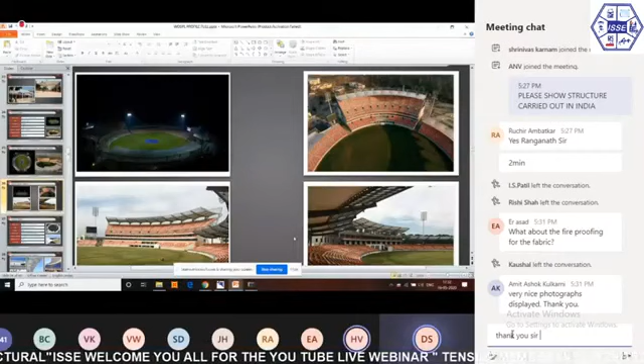But yes, we have used polycarbonate fabrics over here, and the Saurashtra Cricket Stadium, which we covered with a membrane roof. This is again done with Ferrari, and it's almost 10 years old now, and this is just when it was first erected. So here it is again, a balanced cantilever supported by cables on both sides.

And this is the Guwahati Cricket Stadium, and these are various other forms. Amphitheater, or this is a single truss, and again it is stabilized by cables so that in case of loss of fabric, the redundancy is built into the system.

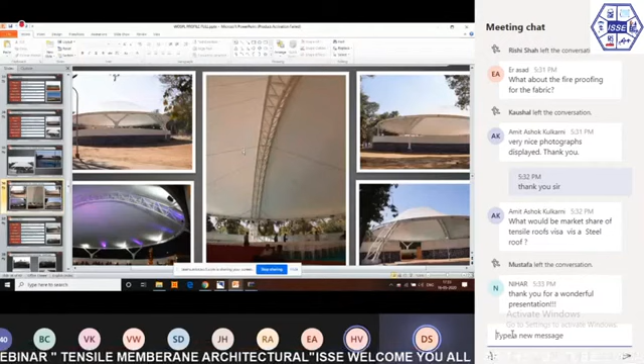And people who are specialists and experienced would take their approach holistically and would not be very optimistic that nothing will happen, kuch nahi hoga. So this redundancy means that in case of the loss of fabric or a tear, which would cause uneven pressures and overturning of this arch, buckling and total collapse, these cables put at regular intervals and calculated inside the software again help us to support the idea of stability.

Smaller structures. Here I would like to mention one very small structure which was very challenging. This is again Ferrari fabric, and you can see how we can play around with light. Very delightful, pleasing to the eye, functional. If you see, these small Hume pipe structures were supposed to be erected, but changed over to brick construction with RCC columns, I think just 150 by 150. So it was a very lightweight structure, and they wanted to make it like a tent.

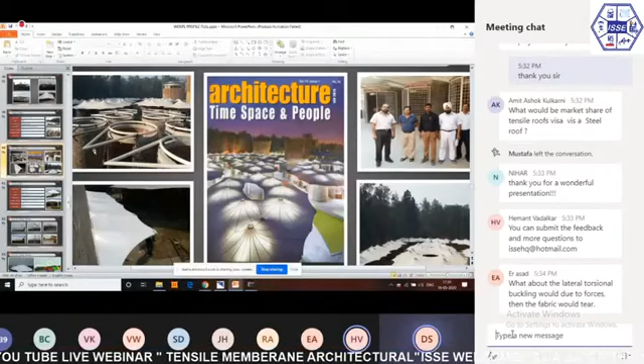But when we actually started to design it, it is a high-speed zone and so on. The problem was these structures were already erected, and depending on this geometry to support structures which had some cantilever on it, all would collapse. So there was a system designed. If you can see over here in the center, I will try and enlarge it. What we did was we built low points at various intervals inside the structure. At the low points, we put in cables and tensioned them downwards. Very heavy deadweight foundations were created.

Rather than putting uplift or torsional forces on the very slender structures, the forces were shared with these cables, and the civil structure was sandwiched between the lower ground and the upper membrane. This was a bit of value engineering, just to mention, which helped in stabilizing and achieving a form.

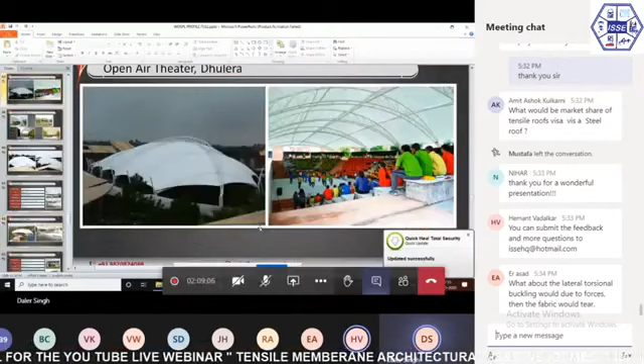Now we can see such kinds of amphitheater coverings, the erection process. Of course, again, a cladded structure, but it is very difficult to convince a form and a shape which does not really protect from the side. But again, you can see over here, this is where the architectural intent also comes into the picture.

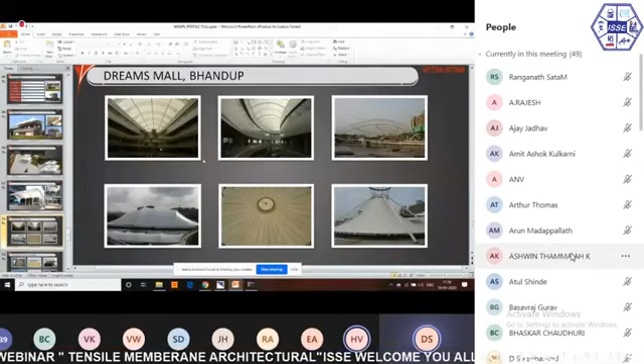Various amphitheaters, cantilever roofs, pavilion stands, car parks, malls. We all know the Dreams Mall in Bhandup. That's one of the first. It had a span of around 70, 80 meters. Then this was done recently for Lodha. But this was a complex geometry.

Actually, it could not have been achieved by any other material because it was a single structure. If I try to look at the functional part, I don't see any functional part in it. But again, here it is a very slender section structure with around a 60-meter span. Again, stabilized by cables over here. You can see the brace cables.

Although it looks very vulnerable, the aerodynamics of tensile structures, the surface, helps in better performance under these conditions. Recently, we all might remember there was a storm called Vardah, which came in the southern part of India. This is based in Chennai. I read it in the papers, and immediately the next day morning I called up Mr. Kumaran, the chief engineer over there, and asked, sir, are the fabric structures there? He mentioned, yes, they are very well there. Absolutely. And that is how, with time and experience, we can say it can be proved. They can withstand.

This was again an entrance canopy, again designed by Sterling. Then various hyperbolic paraboloids, car parks, or a cricket stadium. This was the first stadium in India to use fabric as a roofing material. Then you can see some more forms over here. I think I have not been able to put in much more of what was needed to be shown.

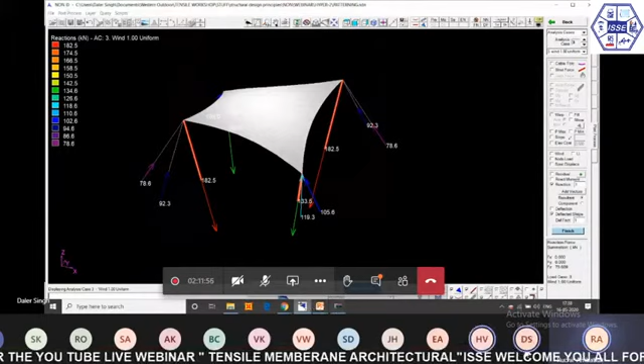There are a few more questions left, like about the fire proofing of the fabric. Well, fire property, I leave it to Arun. I think we can club together questions about the engineering part, so that I will address them quickly, and the fabric part Arun can take up. There's one question about the engineering of the structure: what would lateral torsional buckling do to the forces? Then the fabric would tear. Correct.

Well, this takes me to a concept where we need to organize a workshop rather, because these are in-depth subjects, and you need to be in a comfortable atmosphere where step by step you can present how this industry manages the redundancy. Yes, it is managed and taken care of. In fact, present day software allows us so much liberty that we have deformed models, buckled models, and can predict where the collapse would be. Fantastic. The world is wide open.

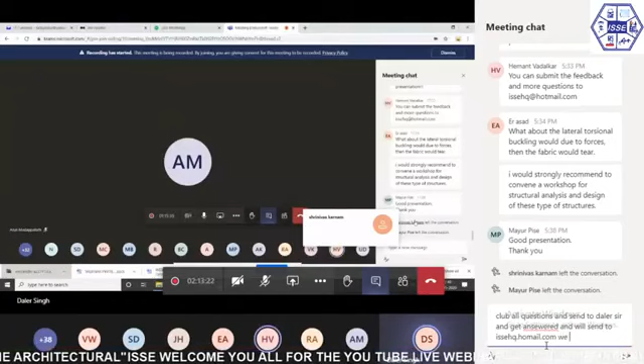Ruchir, we are, I think, close now. Yes, we finished with all the questions. On behalf of ISSE, I thank Mr. Arun and Mr. Daler for the excellent presentation. Members with further questions can write to us, and we can get the answer from the expert. I'm requesting them to give a technical write-up, which we would like to publish in our ISSE journal as well. This is a very interesting form, very lightweight, very elegant, and more engineers should take interest in developing these forms.